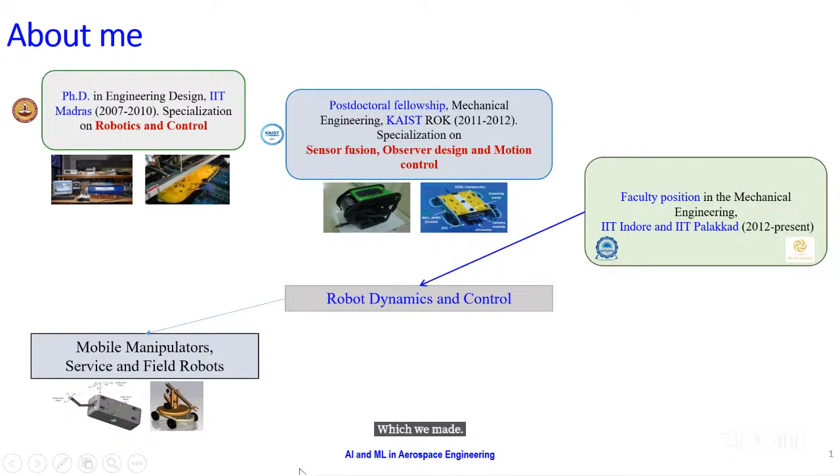So that is the area which I worked, and slowly I moved to other areas like medical assistive devices and parallel robots. This parallel robot would also be helpful for aerial robots, specifically for stabilization of image, stabilization of camera, even stabilization of simulators. So that is where the parallel manipulator definitely will work.

I have a small funny thing. I think some of you might have seen the movie called Lift. In that movie, they have to break a bigger vault. For breaking this vault, they have to use a laser gun, and that's supposed to be stabilized. So the robber, who was the commander, would be asking one of the scientists or engineers who worked on this vault-breaking setup, and this guy says, 'I could not stabilize this particular laser gun, that's why I'm nervous.'

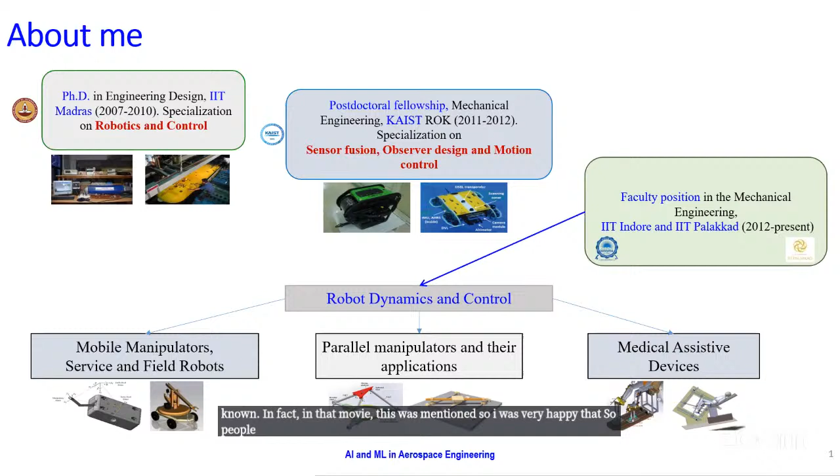Then this robber who's the captain said, 'Hey, why can't you use a Stewart platform?' This is the application for which the parallel manipulator is known. In fact, in that movie this was mentioned, and I was very happy that people are aware that Stewart platforms and parallel manipulators are good for stabilization.

So that is the overview of my background. I have a lab which we call Safe Robots Lab, where we work on service, assistive field, and exploration robots. I'll show a few of the robots because we are not working on only conventional robots, we work a bit non-conventionally.

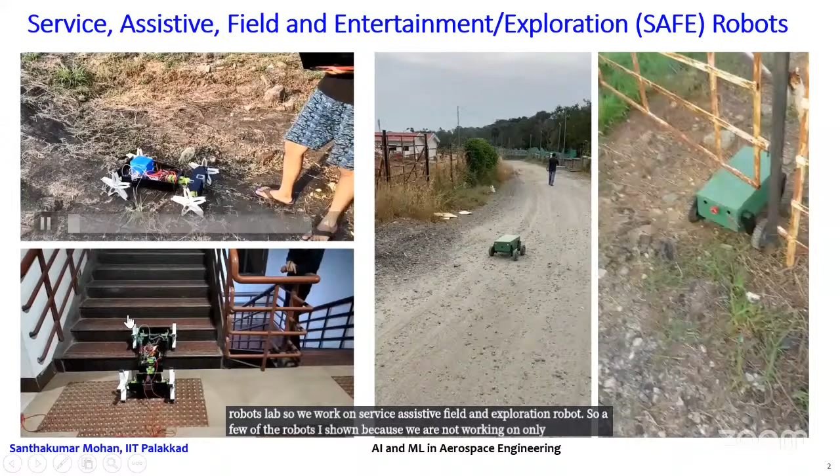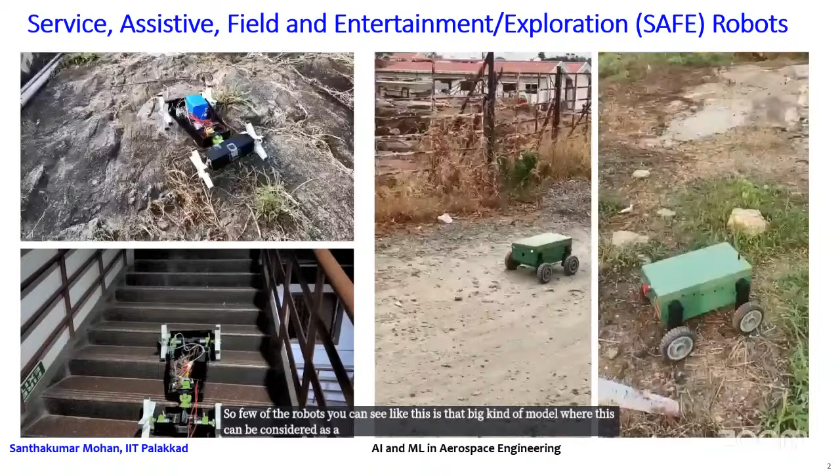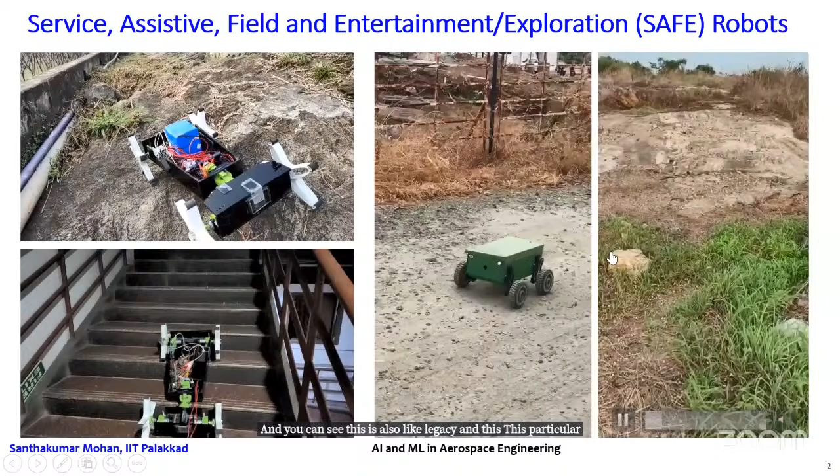A few of the robots you can see, like this big kind of model, can be considered as a wheel and leg kind of thing. And this one is also like a leg type. This particular robot is actually quite interesting because we have already enabled AI-based autonomous capability, so now this robot is supposed to give us surveillance for armed people.

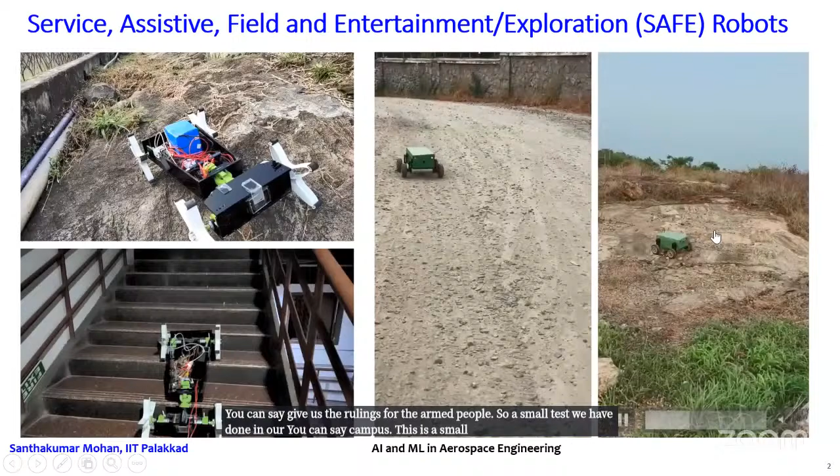We have done a small test on our campus. This is a small terrain located on our campus. The robot is supposed to go over there, do a small inspection, and come down. That is the idea. You can see it navigating the obstacle, going up and down, and then coming back comfortably.

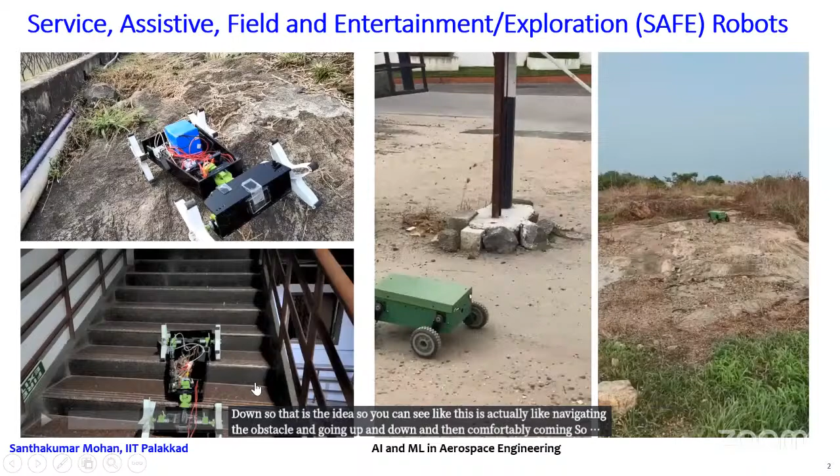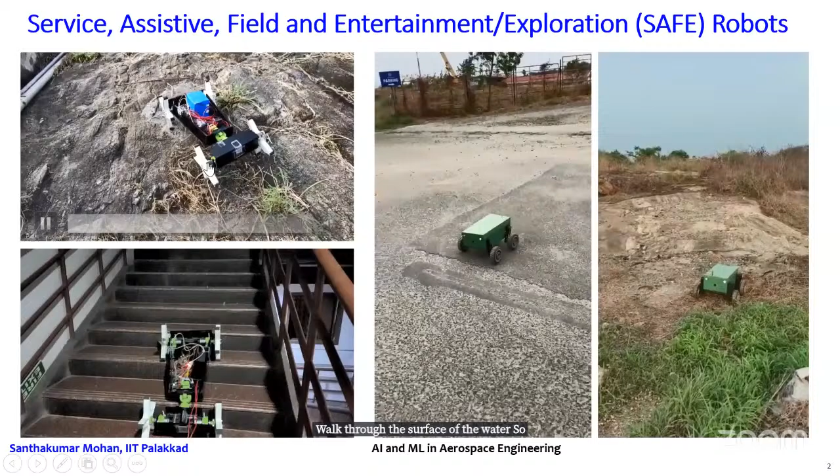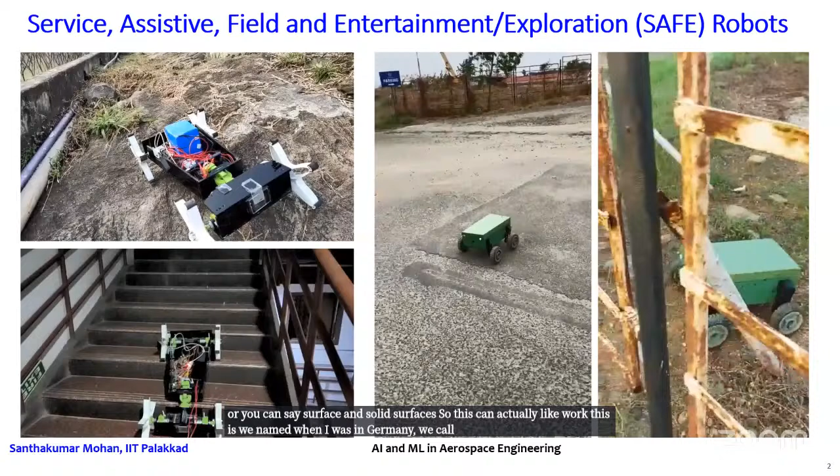You can see here this robot is actually climbing stairs, and it can also go on all terrain. In fact, the same robot, when I was in Germany, we established that it can even walk through the surface of water. So it can work on muddy surfaces as well as solid surfaces. We named this Asgard, and we developed versions 1 to 4 while I was in Germany. That is the idea, so now we go back.

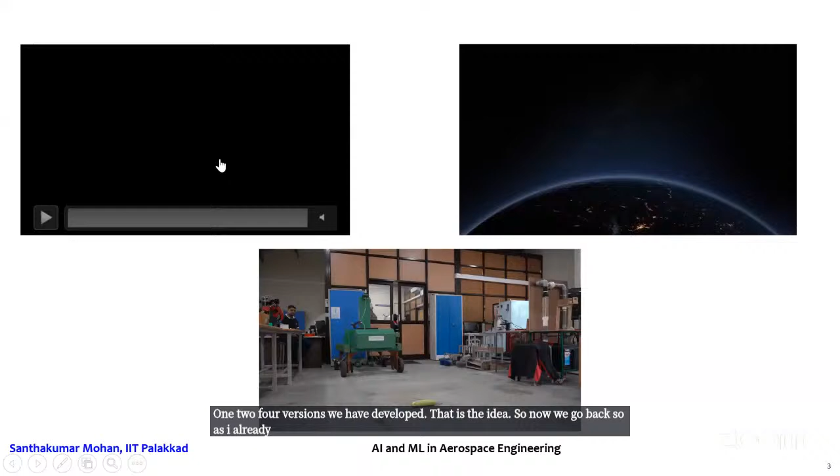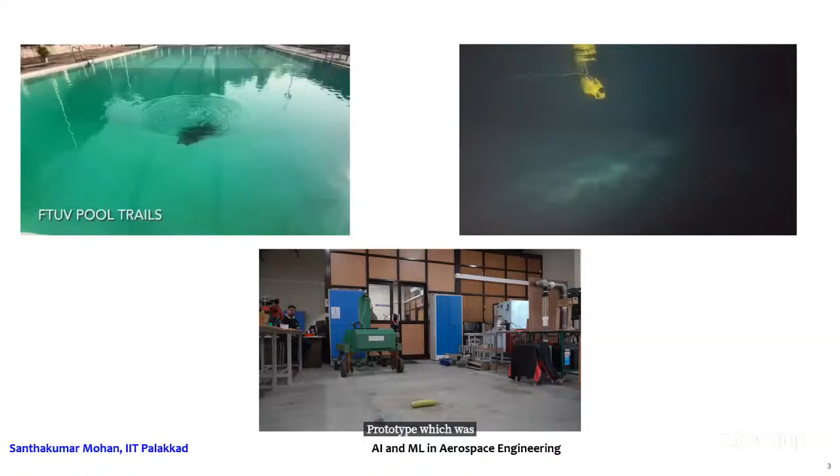As I already told you, I am an expert in underwater robots, so we do work on underwater robots also. I'll put up two interesting prototypes which were recently commercialized, and some of the products would be available probably by the end of this March.

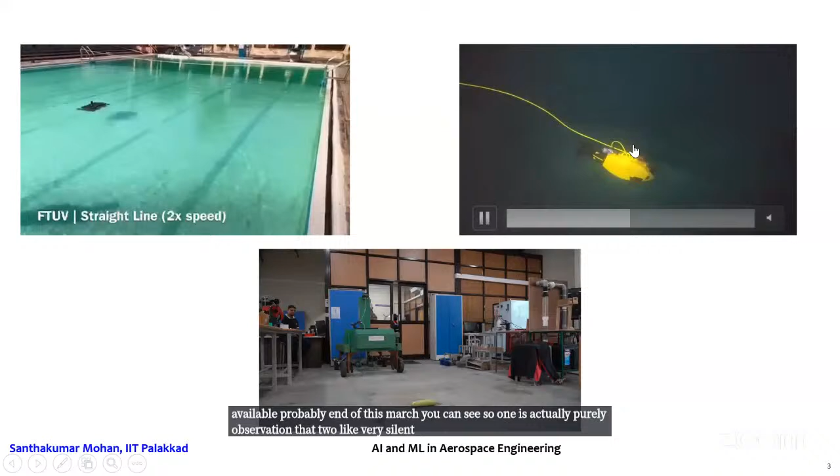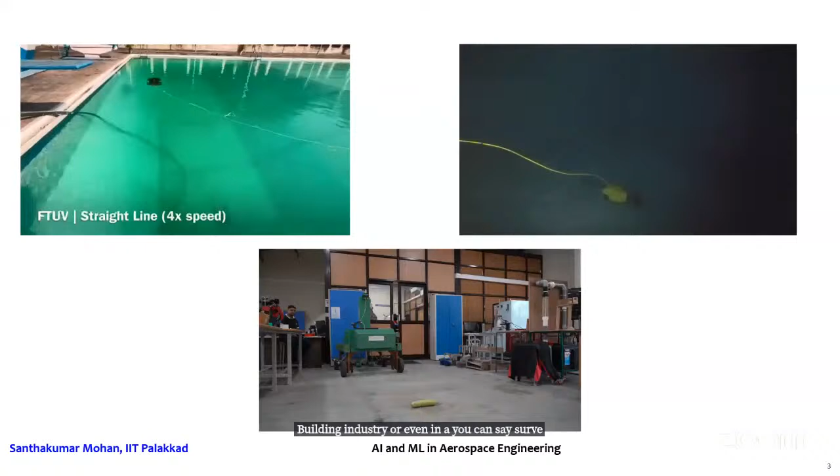One is actually purely for observation, a very silent fish robot. The other one is for harbor or ship building industry applications, or even surveillance and reconnaissance industries. This one is an intervention class vehicle with a manipulator on top, while the other is purely for observation.

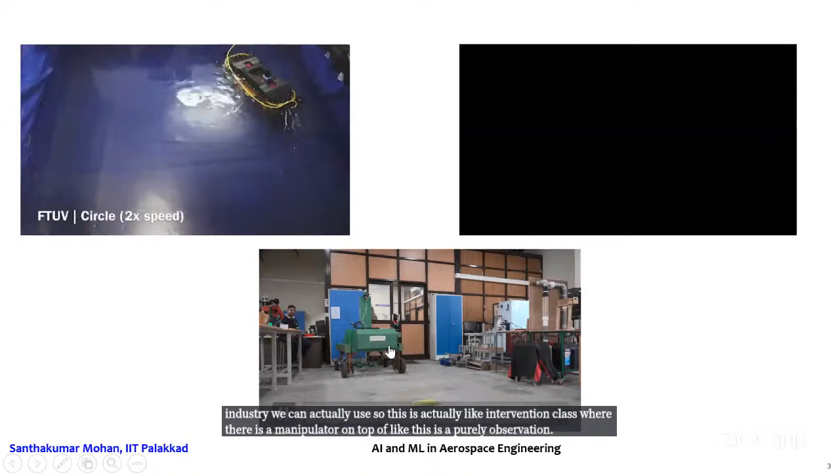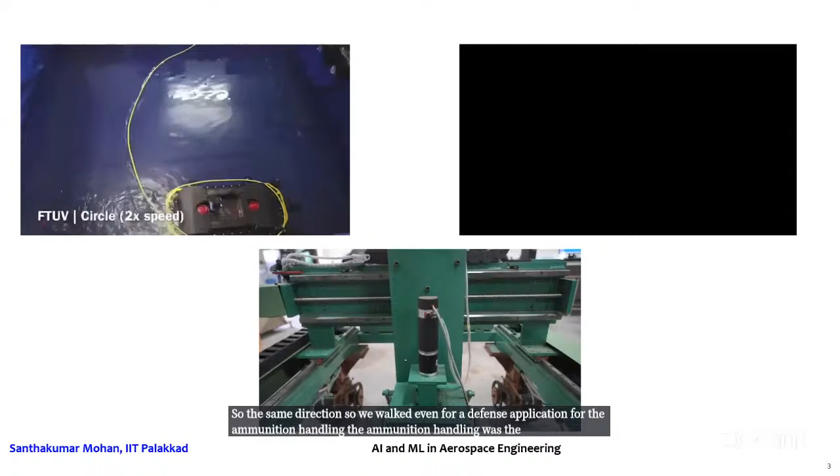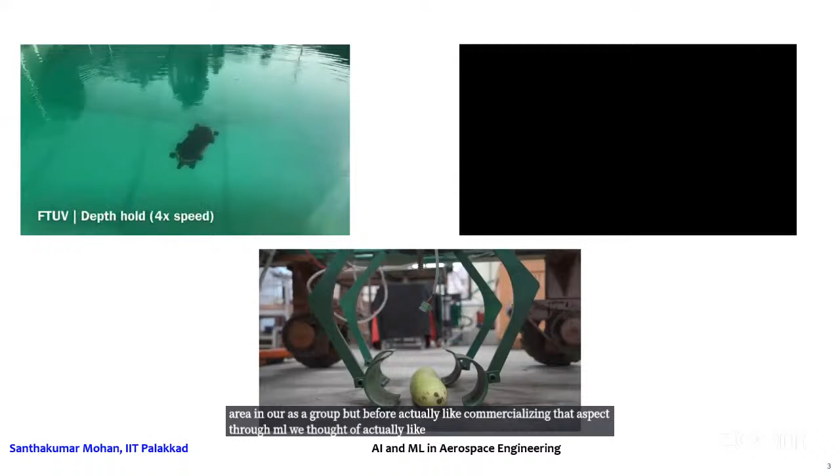In the same direction, we worked on a defense application involving ammunition handling. This ammunition handling work was a very closed area within our group. But before commercializing that aspect through ML, we thought of showing the capability in another area, so we made a larger fruit or vegetable harvesting application and communicated through that.

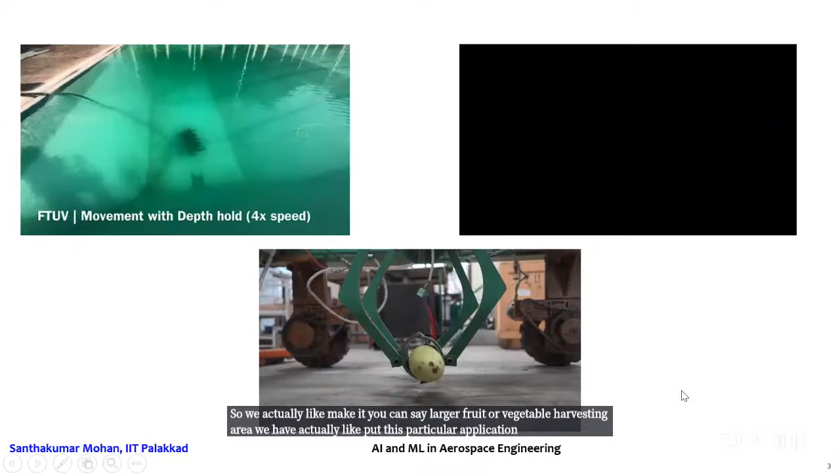So this is the area where I work, and I'm a strong believer in products. In my group, whether they are internship students, BTech, or PhD students, they always end up with a product design or a product. These are a few of our BTech projects from the last 12 or 13 years of my IIT life.

You can see this is one of our recently developed aerial line-following robots. There is a cable line, a high tension cable line, and that inspection can be done with this small cable laying robot.

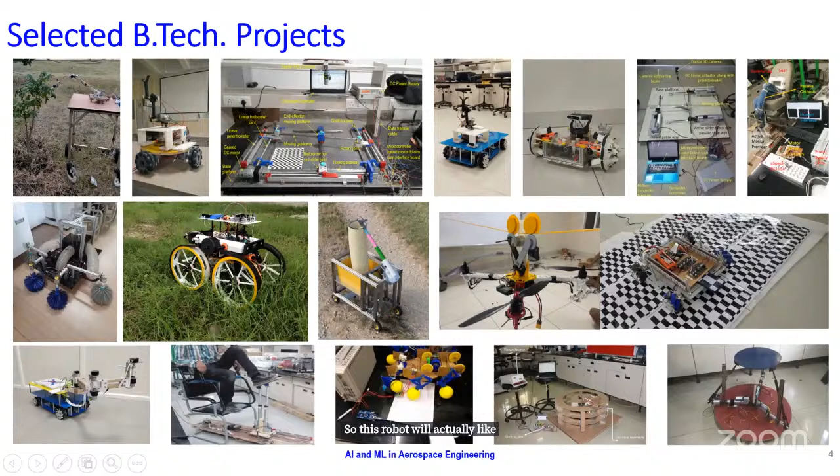So this is one which we have developed, and this is another robot which is actually convertible. You can closely look, there is a rotor also inbuilt, and it's belt driven. This is very similar to an M4 which you would have seen on LinkedIn or YouTube. So this robot will actually convert into a wheeled or aerial robot. This kind of robot system we work on.

When you talk about AI and ML application in aerospace, before that just recall - most of you know what AI and ML are, but just to recall, AI and ML are actually very simple in definition. It's imitating the human or probably animal brain, the human intelligence that you imitate artificially. This is what we call artificial intelligence - directly simulating the system based on human intelligence. To do this, there are several algorithms, logic, and methodology we have to use. One of the bigger algorithm sets we call machine learning, which enables a computer to learn from data and make decisions. So AI is actually a broad term, and inside it ML is there, but since the topic was AI and ML, I just put the definition.

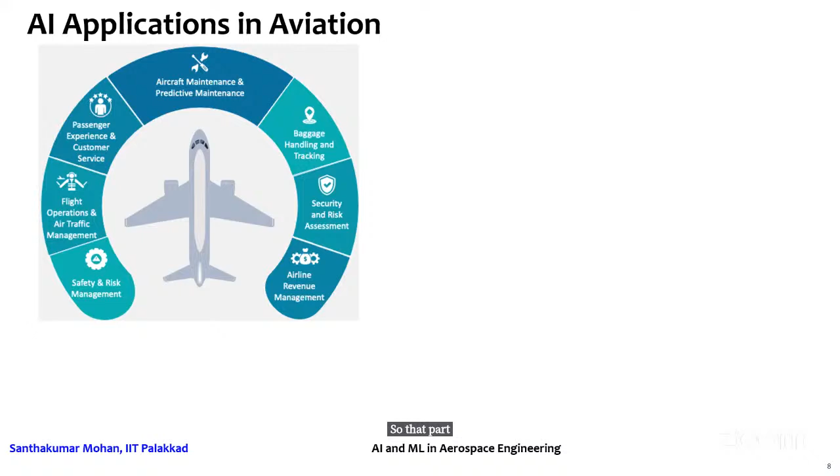So in that focus, let's look at how AI could impact the aviation industry. As I mentioned, I'm putting aeronautical as the focus. In that sense, smart maintenance - we want ease of maintenance or no maintenance, but that cannot be done, so we are thinking about smart maintenance, which would be predictive and preventive. When you put AI into the picture of the aviation industry, you can definitely save energy, in terms of fuel efficiency.

Several times you would have seen that during training, the aircraft crashed, so severity and fatality can happen. That can be avoided using AI-based training simulators. This is a bigger aspect because when you take an aircraft, even a fighter jet, with multiple crews, every launch involves huge money. But the same experience, if brought very close to the real exposure through AI, would be a major change.

This bigger application is already implemented in most well-developed countries. Even the driving license for a truck or bus in modern countries uses AI simulators. The same way, AI simulators can be used for practicing engineers and practicing pilots.

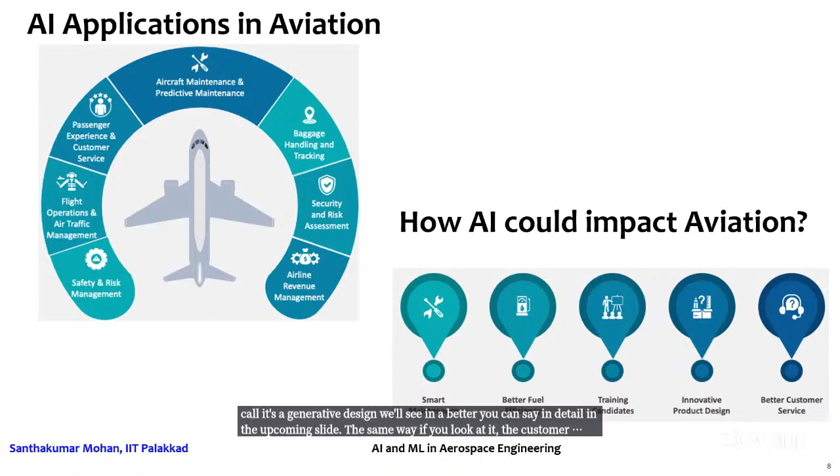The same way, customer service and satisfaction can be achieved better if we apply AI. That's the whole idea, as I already said, with generative design. AI-driven design innovations will give lots of interesting ideas, and these ideas would be optimized if we apply the technology and algorithm properly, giving very interesting aspects in terms of the modernization of design.

For example, you can look at Airbus, the old Airbus 310 or 320, compared to the modern Neo. You can see that at the end of the blade, a curve has come in. Earlier, it was just a fixed fin attached, but now it is curved and bent as part of the wing itself. This is what we call improved design - this curved one is a better design in terms of mechanical engineering aspect. The previous one was a fixed fin attached on the wing, now it is an integral curved part of the wing.

So now you can actually see that the improvement happened. The AI will say what the feature would be based on the optimized design as per the parameters which you set. That makes the design options multiple.

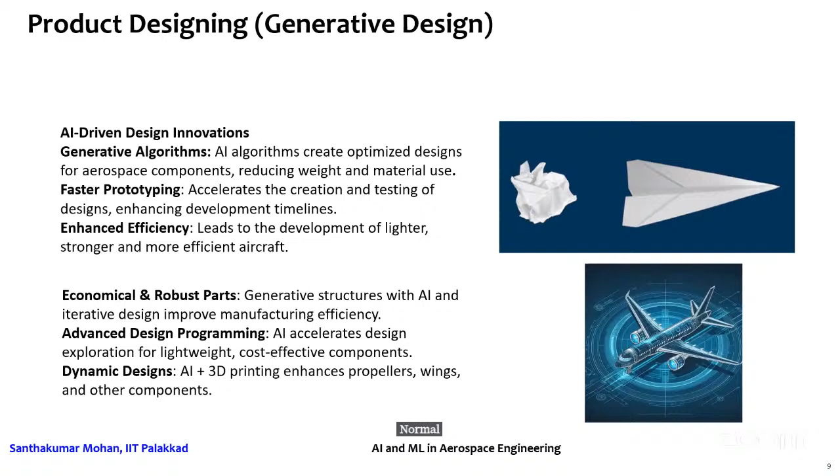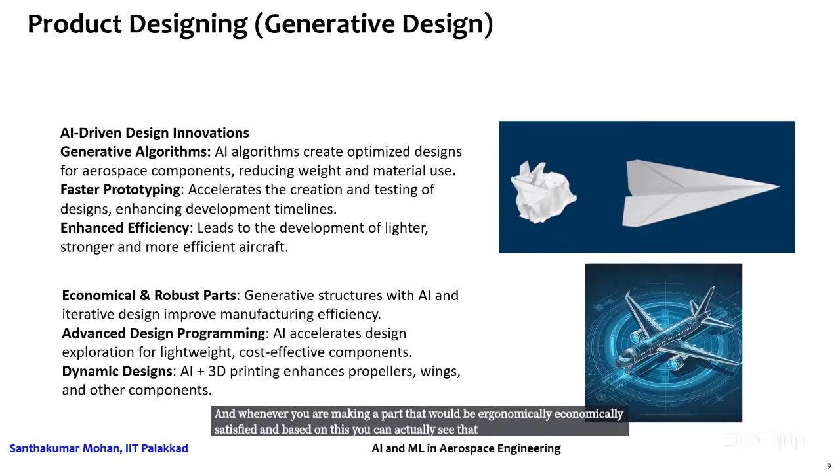So the normal paper becomes a jet, right? The same way, in the next picture every part's data would be put into a cloud, and then you try to improve it. So the parts would be very robust, and whenever you are making a part, it would be ergonomically and economically satisfied. Based on this, you can make dynamic designs, and it can enhance whatever component you are bringing.

The same aspect, if you look at it, several times the pilot spends most of their working time planning their path, planning the end-to-end thing. They see the forecast and get communication from air traffic control, and then they plan tentatively how to fly. Later on, based on the real-time environment, they change their course of action. Everything will be coming.

So if you put in an AI-based system, even from pushback to landing, some tentative designs or tentative course of action would be put towards the pilot. The pilot can validate whether this is good or not, then he can make it. Even the climbing trajectory or where to cruise, everything would be given. Based on the pilot's experience, he can enhance this, or adapt this, and go again.

So if we adapt this way, lots of benefits will come. Even the autopilot will be enhanced by AI. That is where we can see better fuel efficiency being achieved.

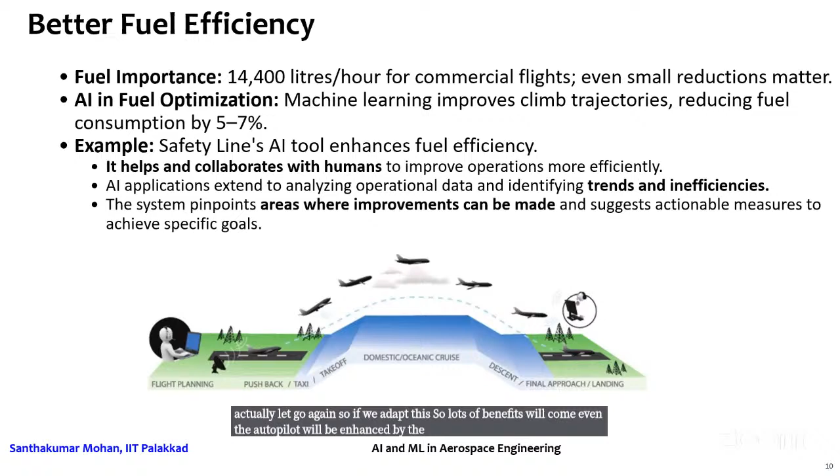The same way, if you look at it, lots of times the aviation industry struggles in supplies. But if we adopt AI-based supply chain management, the supply chain management will be effective, economic, and faster. That is what we are looking at.

For example, from demand forecasting to final relationship management, everything would be monitored and controlled by the AI base. Several of them can be automated, which definitely boosts efficiency in inventory. Even the repairing or supply chain would be completely covered as well.

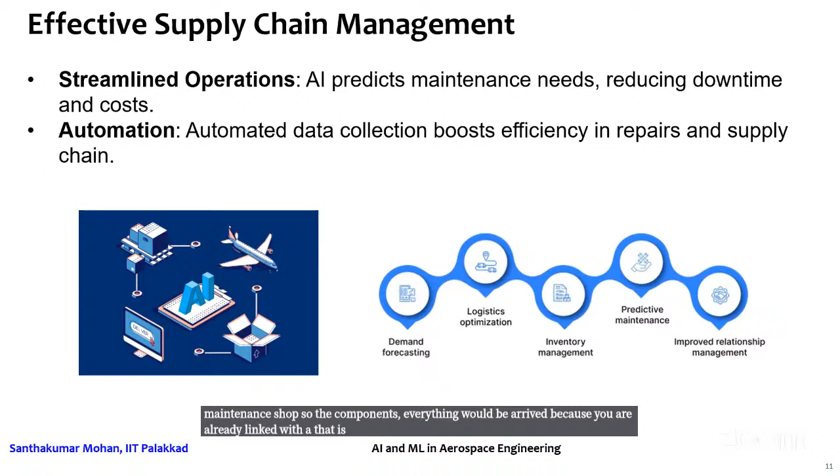As I already said, preventive maintenance and predictive maintenance would be there, streamlined with your supply chain. 'Hey, this particular aircraft requires these components in this particular month, so deliver.' So before your aircraft comes to the maintenance shop, the components would already have arrived because you are linked with the AI. That is what the beneficial aspect is when you talk about it.

As I already mentioned, training and practices are cheaper if we think about AI-based simulations. This would also be helpful for in-flight assistance. Sometimes critical situations might not have been covered during regular experience and training sessions, but if AI enabled, it can provide in-flight assistance. These are all a very good package when you implement AI and ML in the aviation industry.

That is what they are thinking about. Several times you would have seen, even I am from Kerala now. Several times if I want to land in Kochi, the pilot would always say that we are not having clear visibility.

So we are redirecting the flight for some more time. We will come back and try. Otherwise, we will land it in Bangalore, or probably Coimbatore or Trivandrum. The funniest thing is we might have started in Bangalore and we may be heading back to Bangalore for landing. This is really funny, right?

But if we know the weather condition prior, we can plan when to land and where to land. Or even if visibility is the only problem because of smog or some other unknown issue, then we can make use of different imaging techniques so that the pilot's visibility is better. That is the bigger problem.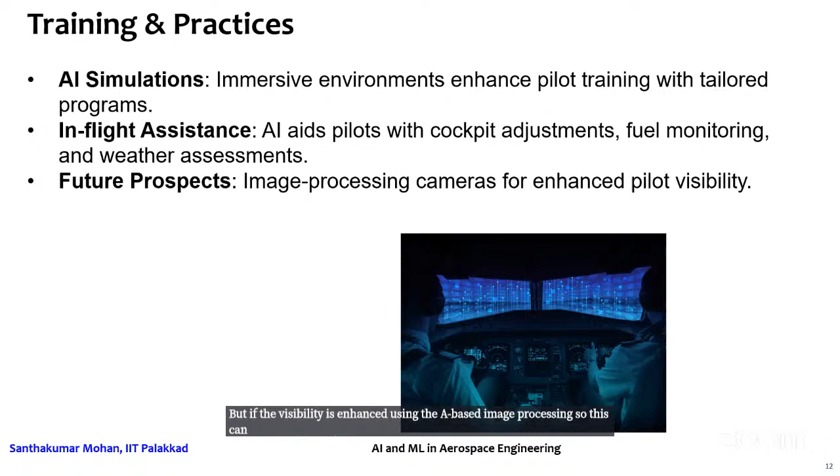As I already said, there's the better customer experience too, and there are several aspects to it. One situation you can think of: all the planes are cancelled at one particular time, and the passenger has to think about what to do. So where is the next plane?

Now, for example, with a chatbot that is personalized for him, he no longer needs to search which airport is close by, where he can get the next plane, or check if his current plane was cancelled and what the next plane is. All those options would be generated based on the cloud and it will just show them. So in that sense, the customer need not even worry.

For example, even when he's making a connecting flight, he lands and his next plane has already taken off, and he needs to figure out what to do next. But before he even starts searching, when he opens his mobile phone with his personalized app, it says: okay, your connecting flight is missed because your incoming plane was delayed, but you have another connecting flight which the airline has already secured, and you can use this. In that sense, the customer would feel completely at ease and have no tension at all.

So all this can happen - that's where we are working on it. And you know already, AirSewa and other systems, airport security checks, everything has already started enabling this. For example, image-based security check-in and airport entry - everything has started happening. All this makes it very efficient in terms of moving through the airport and the aviation industry. That's where we are focused more.

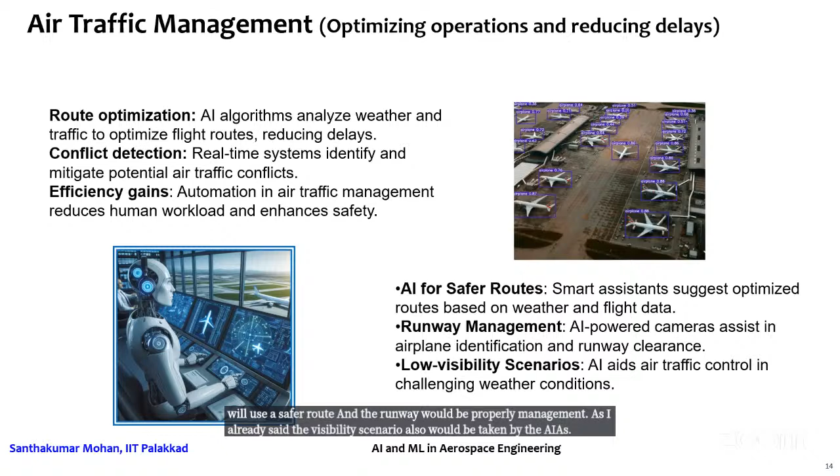So in that sense, one of the bigger problems is not only traffic in the airport - there's also runway inspection. Every now and then, the runway needs to be inspected for any problems or other issues. AI can be used along with upgraded sensors and computer vision technology. Even any debris or foreign objects can be identified and removed, ensuring safety, and the runway would be cleared.

And if there's any crack or pothole, everything would be reported, and we can reroute according to that without even physically going there. Even drone-based inspection, or simply several pathway cameras, can be enabled for inspection.

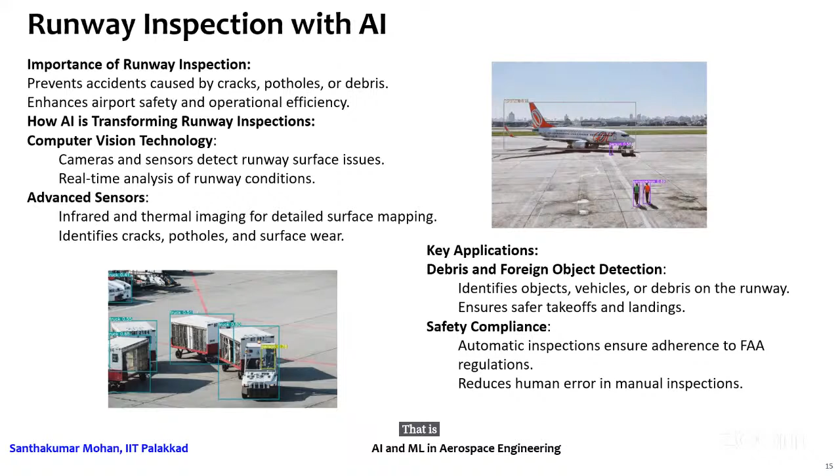That is where runway inspection can happen, and one more threat can also be avoided. Threat detection and identification can be done based on AI. Based on that, passengers can be secure, and civil or commercial operations everything can be enabled.

This is already being used by a few developed countries. For example, behind the airport, if anybody is intruding or not, we can easily check, which passenger, what time, all those things can be recorded in the data, and then we can easily retrieve when we feel some suspicious actions, and when baggage is still rolling on the belt.

Everything can be interrogated and checked easily if AI based techniques are adapted. So whatever I said is in the aviation industry, specifically for aerospace, passenger or commercial airplanes. But on the other side, UAVs and drones are maturing, and as they mature, you need advanced technologies which are AI enabled.

This would be much faster and much more beneficial. There are some setbacks and limitations we would be seeing, but if all these are enabled, the UAV world is like a dream. That is where we are focusing. You would have seen drone attacks in the war field, or in agriculture, drone based inspection, monitoring, spraying, harvesting, everything has started happening.

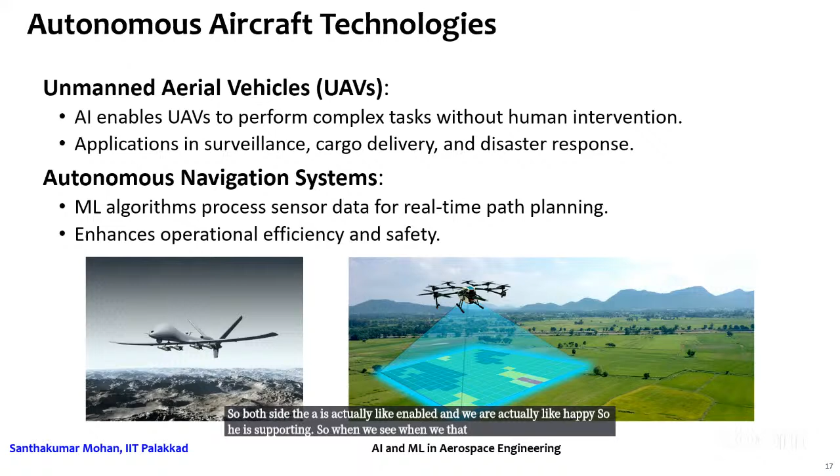When we see AI in navigation and aerial vehicles, what really is the bigger problem? AI-driven safety enhancements - what kind of safety are you trying to make. Autonomous decision making is available for the system, and real-time monitoring is enabled. These two are there.

On top of that, predictive maintenance is also enabled. The AI models will forecast when the system will fail, when you have to replace it, when it needs maintenance, how long the system will fly, how long it will work. All those things can then and there be monitored, inspected, and even replaced. That is the whole idea we are focusing on.

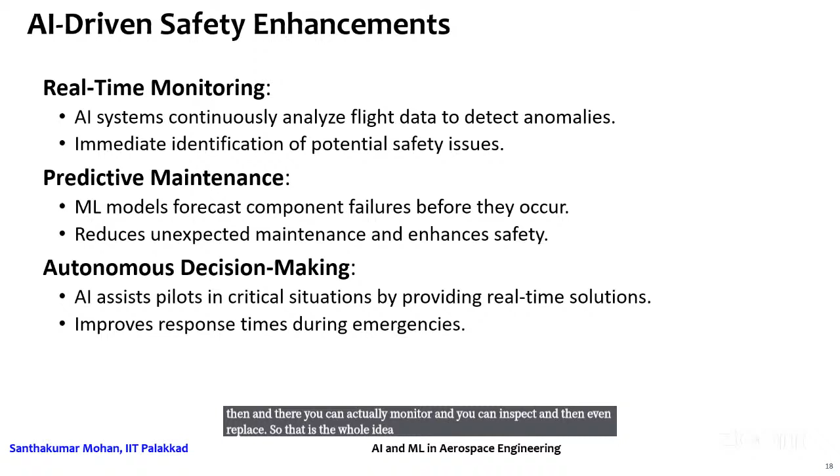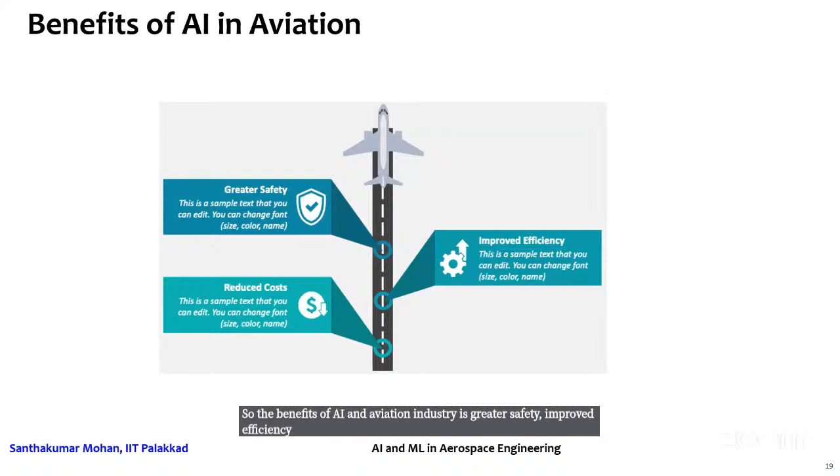If you look at it, the benefits of AI in the aviation industry are greater safety, improved efficiency, and drastically reduced costs. But what are we really looking at in the future? Autonomous flight - this is a very big picture - and intelligent air traffic management.

AI-based robots enabling traffic management, this is what we are seeing. Although predictive maintenance started with ML, what we're looking at is advanced predictive maintenance, even repairing. In that direction, safety and risk management would be enhanced, airline operations would become very intelligent, and a personalized passenger experience can be made.

For example, you enter the entertainment system in the airplane, and when you log your name, based on your previous experience, what kind of movies you like, what kind of games you like, everything would be personalized when you touch it. This is what we call Industry 5.0.

Personalization can happen even in the aircraft or when booking your ticket. If you're always booked in a window seat, in the front with an aisle seat, every time you log in, it will immediately give that preference, which plane is available, all those things. This kind of personalized passenger service would be enabled, and the experience would be dramatically improved. So all the security measures and human-AI enabling will also happen.

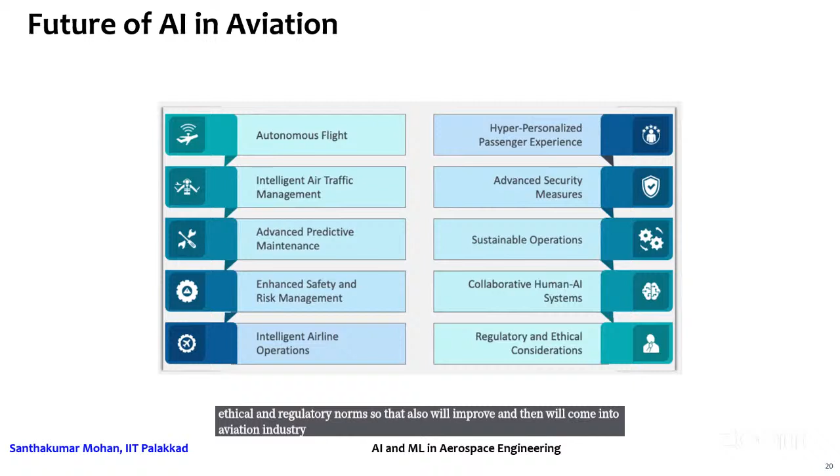When you talk about this, as I already said, there are several risks. Since we are talking about AI, cybersecurity is a bigger problem, and the reliability of the system, whether it fails or not, should be ensured.

For example, take any aircraft's flight control system that you want to test. The first thing the tester, inspector, or authority will ask is whether there is a fixed gain controller enabled in your aircraft. If that backup plan is not there, they will not even approve your flight control system. There should always be a backup based on a constant fixed control gain scheme. The same aspect applies to safety and reliability, which is the bigger concern.

And there's supposed to be transparency. If I use AI several times, the explainability and transparency may be missing. As I already told you, ethics and legal issues are the bigger problem, and data quality sometimes may be poor and needs improvement, or sometimes data may not even be available. How do we overcome that?

Sometimes cybersecurity is one part, but even when cybersecurity is not an issue, there can be unintended consequences. For example, if I ask the aircraft to rotate positive 30 degrees, unintentionally it might rotate minus 30 degrees instead. That would definitely be a risk. That kind of problem can occur, and that is where the risk lies.

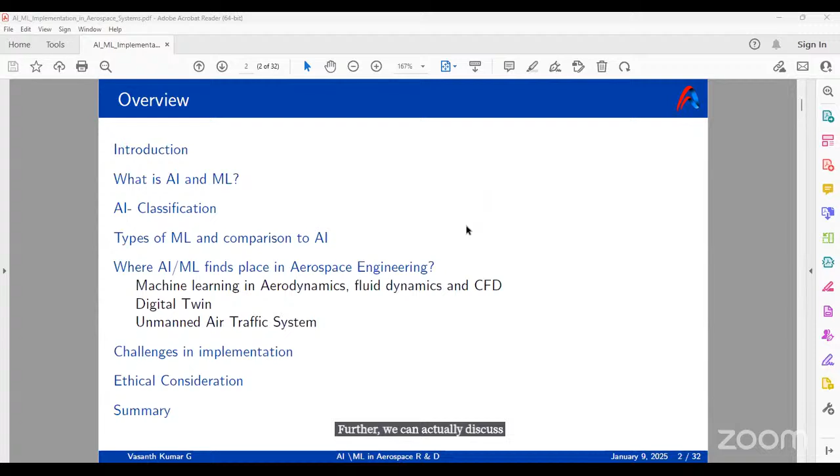Okay, I'll start with AI. People who have been using phones or doing any kind of day-to-day activities can see tremendous changes happening. One thing I was able to link is the availability of data. Of course, there are other reasons too, like computational power has improved, resources are limited, and population is growing, so there's a necessity.

But there's a saying that if you don't have a wall, you cannot draw. So that wall is the data. How much data is generated? In 2024, it is 147 zettabytes — that's 1 into 10 power 12 GB of data worldwide. I don't know who calculated this, but it gives a basic idea of how much data we're actually consuming every day.

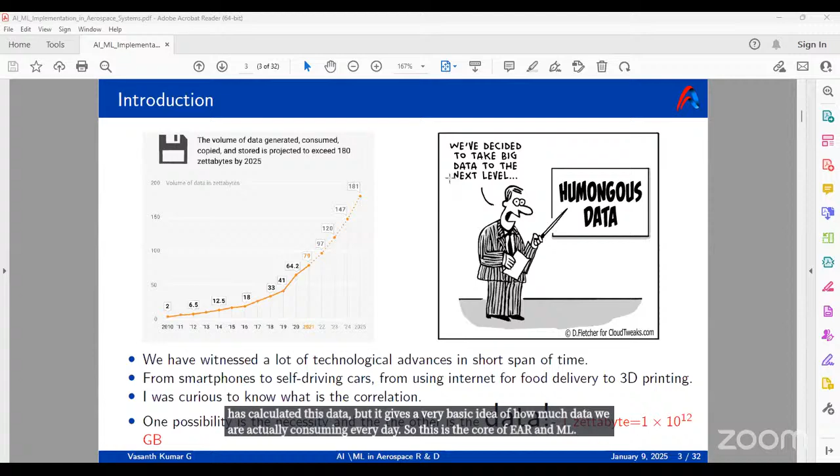So this is the core of AI and ML. With that, let's go to the difference between artificial intelligence and ML. Artificial intelligence is simulation of human intelligence.

You can think of artificial intelligence like a person making a decision — 'Today I'm going to go there, today I'm going' — this kind of decision you don't even take time to think about. It automatically happens like that. You don't need to program something; it automatically happens. That is artificial intelligence.

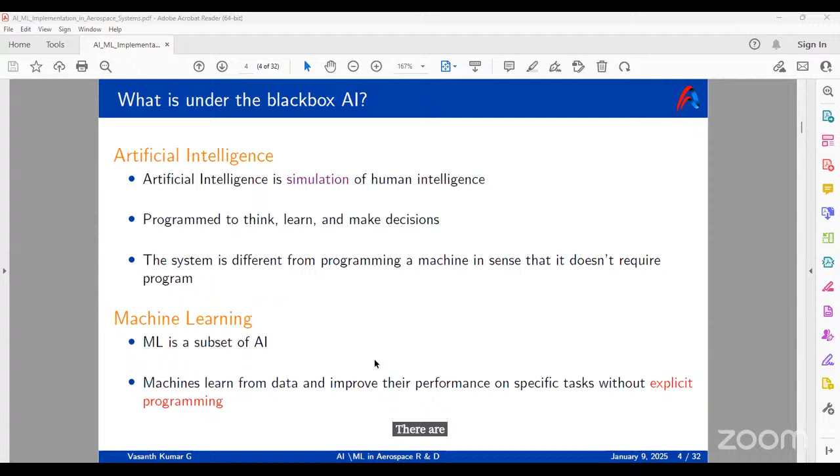Machine learning is one of the ways to achieve artificial intelligence. There are different tools that can achieve artificial intelligence, and machine learning is one such tool.

Let's go into some examples, then I'll be able to explain it better. We have three different types of AI. One is narrow AI, like Siri, Google Assistant, and self-driving cars. They are all like workhorses — programmed to do one thing, and they do it very well. For our aerospace application too, narrow AI is sufficient because we need one particular task given to a system. That is narrow AI.

Generative AI is what we see as ChatGPT. They are much more capable — you can give text input, video input, and ask any kind of questions. It will be able to answer, it will be able to solve. So it understands multiple tasks and gives you a response. That is generative AI.

General AI is what people think of when they imagine artificial intelligence — like a robot, like in the movie iRobot, something able to think and make decisions on its own. With current technology, general AI will take much longer to achieve. Even though the amount of data we've generated is humongous, general AI is much more complex, so it will take a long time to reach that level. For now, we've reached up to generative AI, where ChatGPT, Bard, and others are examples.

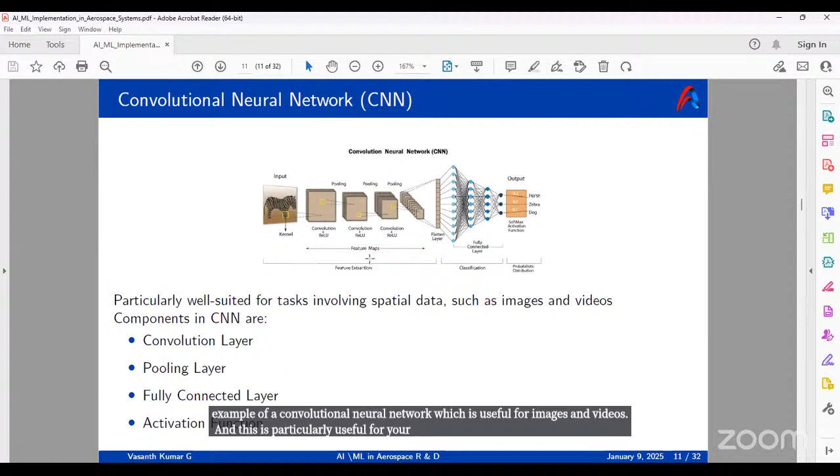Coming to our aerospace engineering, why do we need AI and ML? You can see that everything is going to double in a short span of time, over the 10 to 20 year period. During my time, we were not so frequently flying in aircrafts - that was considered a luxury. Now people are thinking, what is a flight fare, we can check. We have reached a stage where it is becoming much more affordable, and the societal background has changed. All these things have contributed to improvement in using the airspace, so there is going to be a tremendous increase in demand for aviation.

Coming to India, we can see there is going to be again a double in the requirement, and Boeing is already anticipating that more aircraft will be purchased by Indian Airlines. So there is clearly a requirement for AI and ML in aerospace engineering.

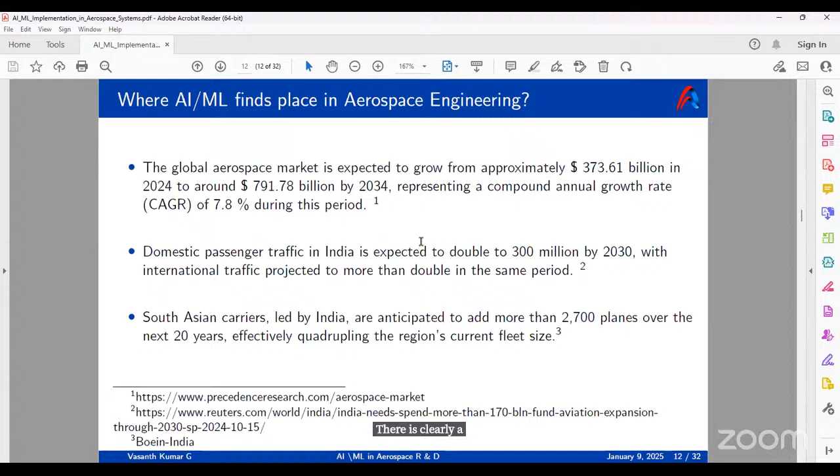So where can we apply AI ML in aerospace R&D? We can go for aerodynamics, fluid dynamics and CFD, propulsion, predictive maintenance, unmanned air traffic management, structural health monitoring. These are some of the areas. I'll be talking about aerodynamics, fluid dynamics, CFD applications, and predictive maintenance.

I will use one example of a digital twin to explain the concept of AI ML in predictive maintenance.

For air traffic management, drones are very common now - much more prevalent compared to what we have seen before. So I'll take up unmanned air traffic management as one case where we will discuss the application of AI ML.

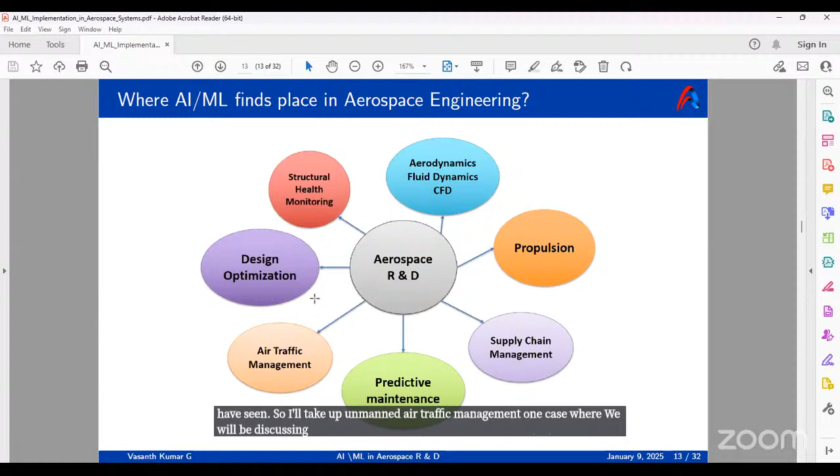Machine learning in aerodynamics and fluid dynamics is actually a tailor-made situation for aerospace applications, especially for turbulent flows. Turbulence is highly complex - there are scales in turbulence which cannot be resolved. There is no closed form solution for solving turbulence equations, for the Navier-Stokes equations as such, only turbulence models.

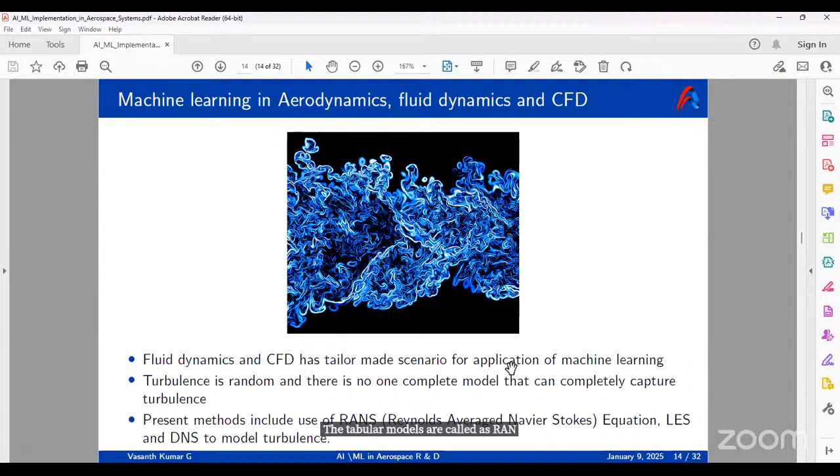We are generating a lot of data through experimental observations, and using different turbulence models. The turbulent models are called RANS. Its very basic classification is RANS, URANS, hybrid RANS, LES, and DNS.

RANS is the lowest level because it filters out all the scales, giving us an averaged Navier-Stokes equation. This is excellent for getting instant results, like for industrial applications where you are not going to spend months doing research. RANS is an excellent tool that gives you fundamental input for design aspects. Then there's unsteady RANS.

Then LES - actually turbulence is not completely isotropic or anisotropic. In RANS we are making an assumption that it is isotropic, which is not correct. In LES, what we have...

DNS is something which is at the pinnacle of computational simulations. Here we solve the complete equation, but this is computationally very expensive, and even now, very simple cases like flow over a channel or flow past a simple sphere have only been carried out using DNS. So there is a requirement for AI ML in turbulence modeling.

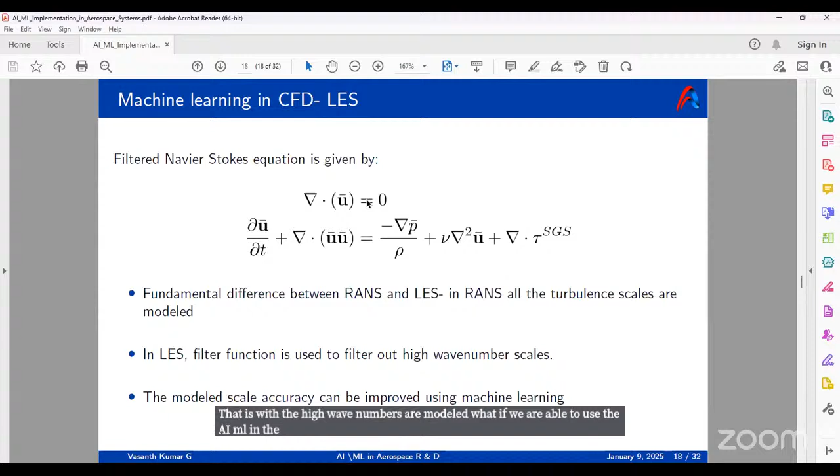What if we are able to use AI/ML in the LES models? Machine learning contributes by supplementing the unresolved energy in the coarse mesh using supervised learning. We studied earlier that supervised learning is regression and classification. So through that regression and classification, you give the input to supplement the unresolved energy. The second one is reinforcement learning, developing agent-based approaches to stabilize the coarse simulation.

But the problem is that for supervised learning, there has to be data. Let's say there is data A and it will give an output B. So that high fidelity data is needed, and that will come only from DNS. DNS simulation was difficult in the first place - that is the reason we went for LES. Now, for LES to have an ML component, we need high fidelity data.

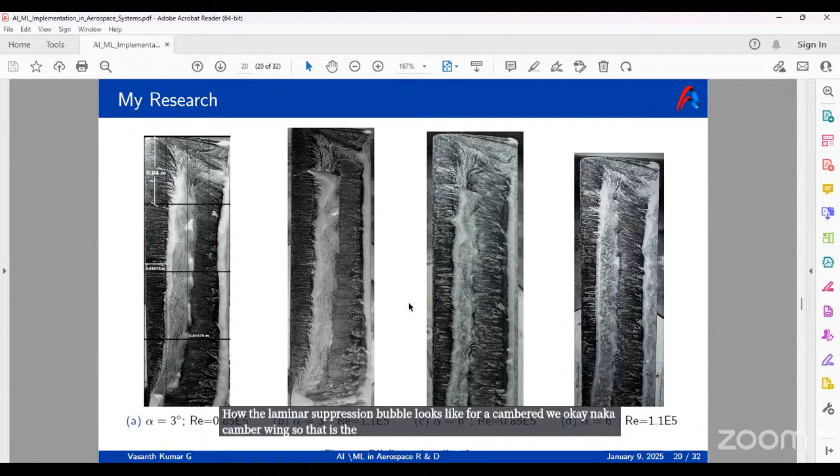I will not go deeper into that. Okay, coming to the predictive maintenance part.

Here, I don't know whether you have heard of the term - it's called digital twin. So there is actually a hardware system, and in the virtual world, the same system is generated as a virtual model.

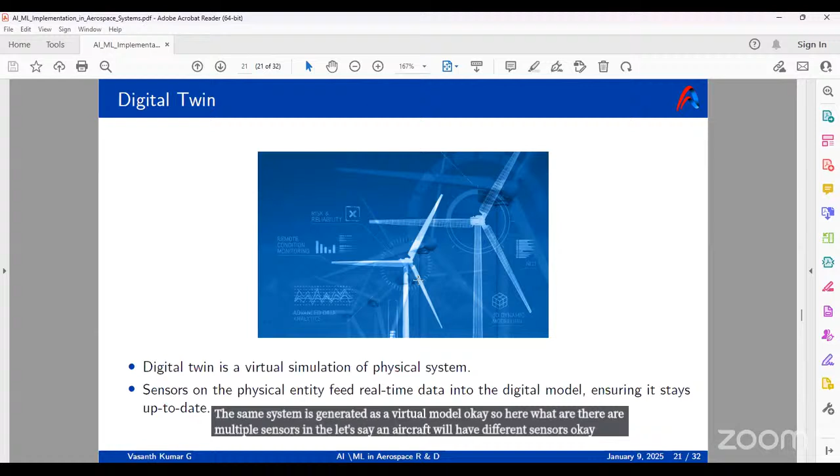Here there are multiple sensors - let's say an aircraft will have different sensors, lakhs of sensors are there. All the data from the sensors are fed into a virtual digital twin.

The problem with the digital twin - I will not go deeper into the mathematical part - is that if you want to model a system, it is an n-dimensional system. If you want to solve it completely, let's say you have an aircraft with turbulent flow over it and you want to create a digital twin, it is very complex to model the complete aircraft exactly the way it is going to fly in actual real life aviation.

So for that, we are going to have some techniques to reduce that - whether it is reduced order modeling or sensor-based Internet of Things, we will take the help of that.

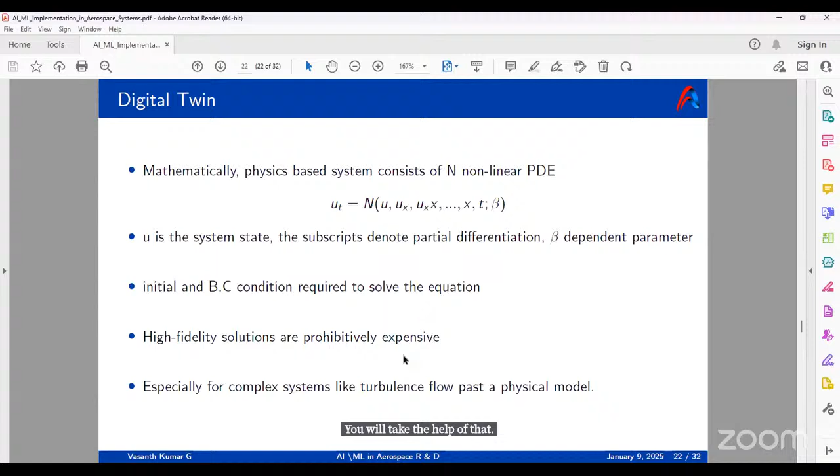So sensor technology and Internet of Things - what it does is, this high dimensional system can be modeled using reduced order modeling. Reduced order modeling means you have a system with n dimensions, and you are going to find out what is the most influencing factor. That factor will be identified and you will have a reduced order.

This is the fundamental of an ML system. Let's say you are going to buy a house. There are a lot of factors - how far it is from this place, how far from the hospital, how far from the main road. There are multiple factors, they are all dimensions. But one thing will be predominant for you - either it's a monetary consideration, or location consideration, something like that.

So this is just a very crude understanding of reduced order modeling, the way I understand it. You can refer to standard textbooks on what reduced order modeling means. So instead of taking data from every sensor and feeding it directly, we will have a reduced order.

The main sensor data is given, and then you are able to model the digital twin. This is a reduced order modeling - you have an n-dimensional system and you're having a reduced order. So when you are projecting the result, it will be similar to the n-dimensional result. It will not lose the data, it will not lose the information. That is a digital twin.

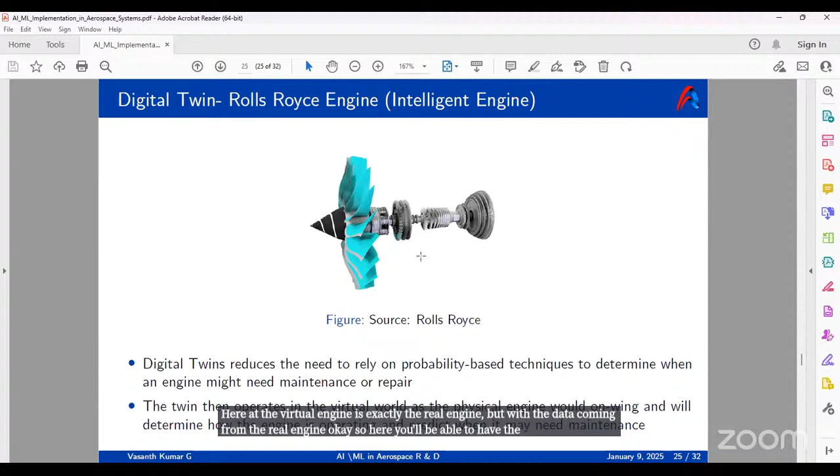Rolls-Royce has already introduced an intelligent engine technology a few years back, where you have a complete digital twin of the actual engine, and the data that is fed into the engine through the flight is given to this. Before it is going to fail, the virtual engine will indicate, because you can model this virtual engine to see when it is going to fail and how. So instead of waiting for the actual aircraft engine to malfunction and then doing a case study, the virtual engine is exactly the real engine but with data coming from the real engine. You will be able to understand when the engine will fail. This is a predictive maintenance example.

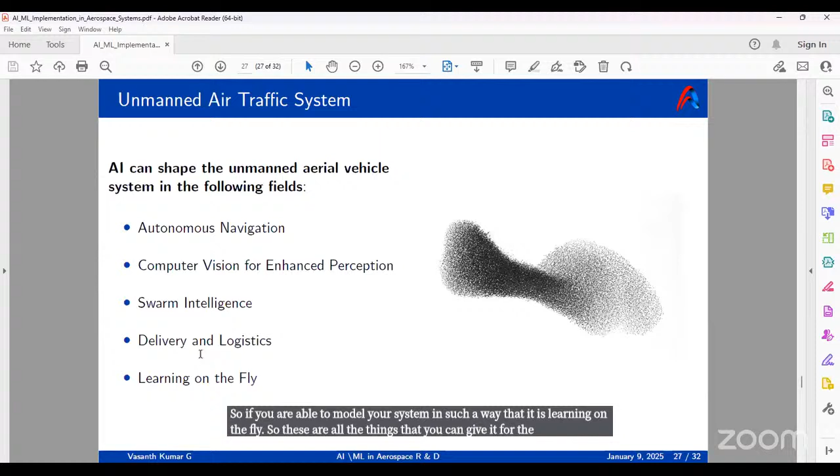Finally, I will wind up with unmanned aerial systems. For an unmanned aerial system, air traffic management has to come into picture at some point, because drones are not being used for transportation to a larger extent yet, but at some point it will come, and then you should have a traffic monitoring system. AI can help in autonomous navigation, swarm intelligence, delivery logistics, and learning on the fly - like during flight, a bird is able to see a vehicle coming on the road and takes a diversion. If you can model your system to learn on the fly, these are all things you can give to the drones. But mainly what I'm considering here is the traffic management system.

One case study you can take a look at - there might be different cases, this is what I was able to find. Airwayz is one company that has created an unmanned traffic management system. It's an Israeli company, Tel Aviv based. It has deployed AI, and the system has anti-collision, dynamic management, and temporary U-space. So if you want to fly a drone, you have to give the flight path and tell from where it is going. It will automatically get inputs from the weather data, whether there are any other drones, and all these things, and then it will give the information directly to the drones whether that flight path is okay or not.

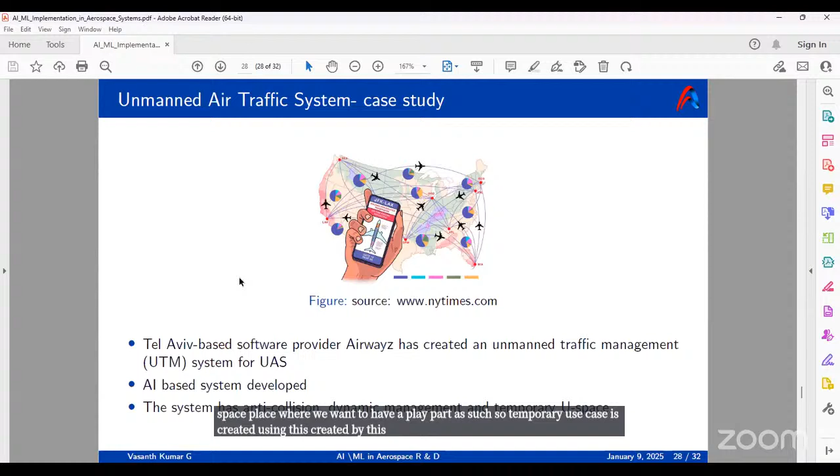Temporary U-space means that if you want to have a flight, it's not like a fixed airspace, because in aircraft that whole thing is sequential - you know what is a flight path. But in drones we haven't reached a place where we want to have a fixed flight path. So temporary U-space is created by this company. If you want to take a flight, you can take a look at their study and understand.

Whether it is accessed by the whole world and researchers are working on it, then you will be able to generate results. If only one company is working on AI, then it will take a long time. Cybersecurity challenges exist too, someone can hack into the system and modify the routes, so there are challenges in the cybersecurity area also.

And people generally don't want change. When you say this is the system that is going to take over, the first reaction will be from pilots and regulators. They will oppose these changes, and there is a fear of job displacement also, because AI doesn't get tired. You can give any number of data, keep asking ChatGPT multiple questions, and it keeps giving answers.

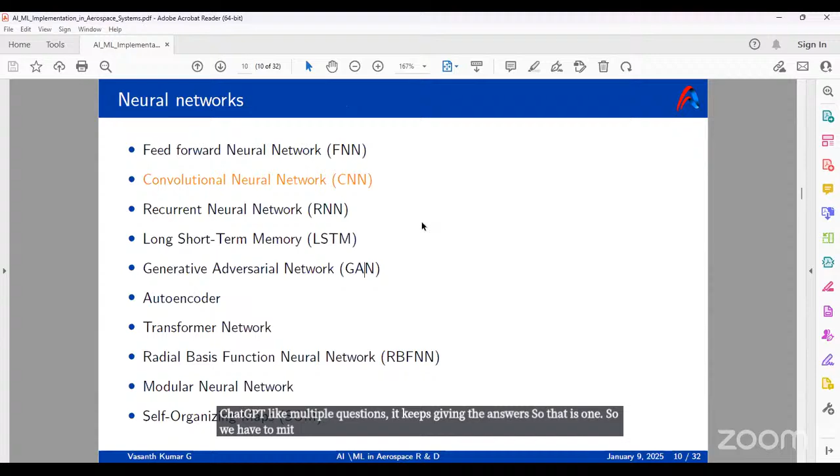So we have to mitigate all these challenges. Okay, sorry, where was I saying.

Ethical considerations - it is considered a black box. We don't know what is going on inside the AI. There is a famous quote I love: statistics is used by a drunken man as a lamp post, for support, not illumination. If you want to prove something, you take the data that is necessary for you and say that this is correct, instead of illuminating the fact.

So that kind of bias may come into the system, and it will be trained in that way, so the whole decision making will be different. And what is the regulatory authority? Who is responsible if something goes wrong in the AI? All these things, a framework has to be laid out when you are going for AI consideration.

As a summary, there are multiple areas where it can be implemented. We have covered three areas: one is CFD, where I have taken up the RANS-LES model; predictive maintenance and digital twin; and unmanned aerial air traffic management systems. One company has already implemented it, and you can take a look at it and see whether we can do a similar thing.

So there are challenges and ethical considerations, but definitely there is going to be growth, just like our boundary layer theory was not that famous when it was introduced by Prandtl, and over time something like that is going to happen with AI/ML, because the more I read about this, the more fascinating it looks. So in coming years, AI/ML will definitely be part of the aerospace industry. Thank you.

So today's agenda for the session: drone data, elements of image and video interpretation, introduction to photogrammetry, types of image and video, and drone video data analysis.

So actually we are collecting a lot of data from the drones, because drones are used in various industries - majorly agriculture industry, videography industry, mapping, surveying. So we fly the drones on different places, we collect the data using the drones. Generally there are two types of data - process data and measured data.

Measured data is the data we collect from the drones. Drones have SD cards, storage devices fitted on them. So we fly the drones - it may be agricultural field, surveillance, land mining, mapping. We can fly the drones in different areas and collect photographs, videos. This data will be stored in the drones' memory cards. That data is called measured data.

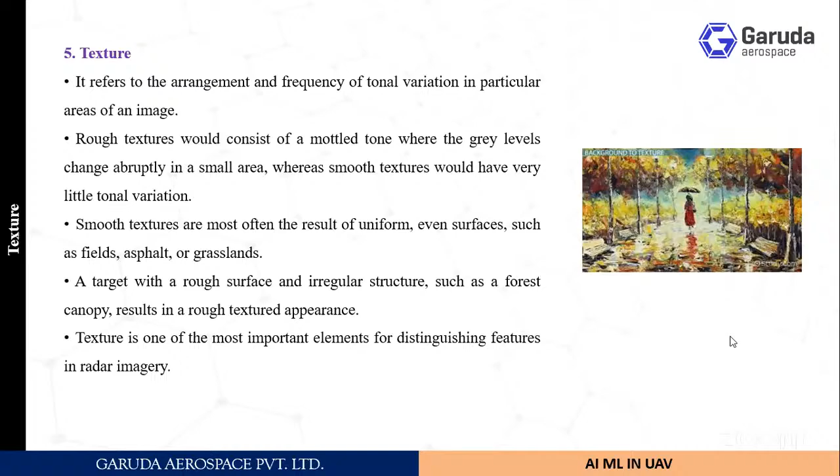These are all the things the algorithm should perform: first check the color of the object, check the form of the object, the structure of the object, and the size of the object, and the spatial arrangement. What is the pattern of the objects, how these objects are arranged, which pattern the objects are arranged in, and what is the texture—the arrangement of tonal variation of the object, whether it's smooth texture or rough texture—and shadow, and association, how one object is linked with another object.

For example, if you want to buy a house or buy some commercial shop, we need to verify some basic features. If you want to buy a house, it should be nearby a school, playground, grocery shop, or sports field. If you want to buy some commercial property like a shop, you need to verify how this property is located nearby major transport routes.

We need to define all that information in the algorithms, and algorithms are developed by expert people. Because they work on this type of data processing for years together, they develop the algorithms, patent them, and either give them for free or sell them to other companies.

What we are doing is providing all the data to this algorithm. Based on the steps provided, it will predict the future result. This prediction depends on what data we are providing. If you provide realistic, good data, it will predict the exact result. If you give rubbish data, the result you get is not accurate.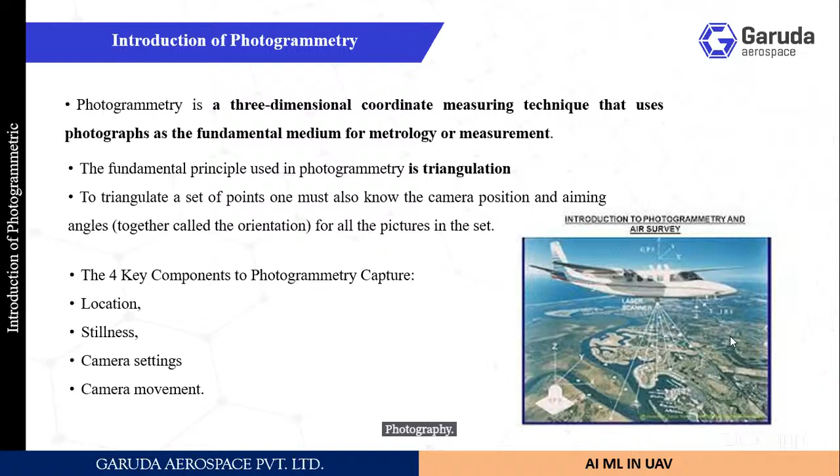So what do we need to do? Previously we used different types of cameras to take photos. Instead of cameras, now with drones we fit the camera, and we have a tripod to give static movement to the camera, along with computers and software. All those things are mounted on the drones, which may be vertical takeoff or horizontal takeoff drones.

We need to fly the drones on the field and collect data in different fields. The field may be architecture, building or engineering applications, manufacturing companies, quality control departments, topography mapping, police investigation, cultural heritage, or geology. So we can use this photography drone in most industrial domains.

So how are these videography drones used in police investigation? Because in many places there is illicit liquor production, police give us a project to fly drones in different forest areas to find where the illicit liquor is.

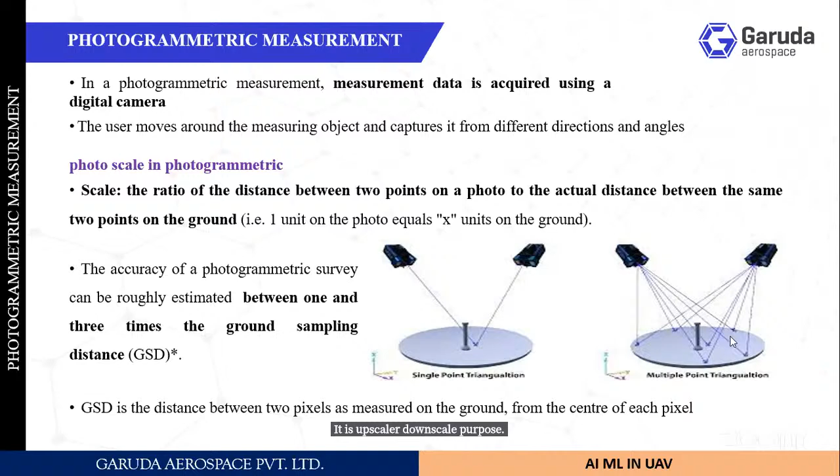There are different methods of image processing, like analog image processing and digital image processing. We have different analyses for video analysis, like artificial intelligence algorithms and facial recognition algorithms.

That data processing lab is nothing but computers installed with machine learning algorithms and deep learning algorithms. The result data, the output, will be given to the different companies.